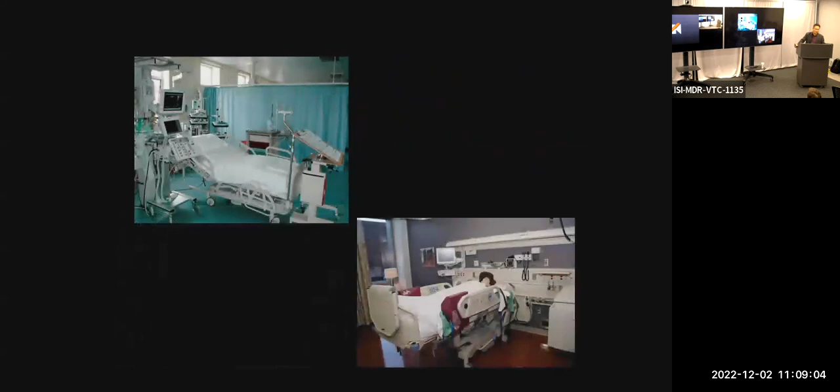Very fortunately, I used to work as an intern when I was a graduate student in a general hospital. Not as a patient, I enjoyed going to that facility as an intern student, and I was able to meet a lot of patients who are physically limited, especially in the ICU, intensive care unit, on the left, and on the right a general patient room. I was able to see many cases where the patients' physical condition is very limited, so the only thing they can do all day is lie in a bed and see very bright fluorescent light all day long.

And their temperature, lighting, everything is 100% controlled based on the preference of the doctor and nurse, not the patient. So it gave me a lot of inspiration and also motivation: what should I do further in the architecture domain to make people healthy and comfortable and stay in well-being?

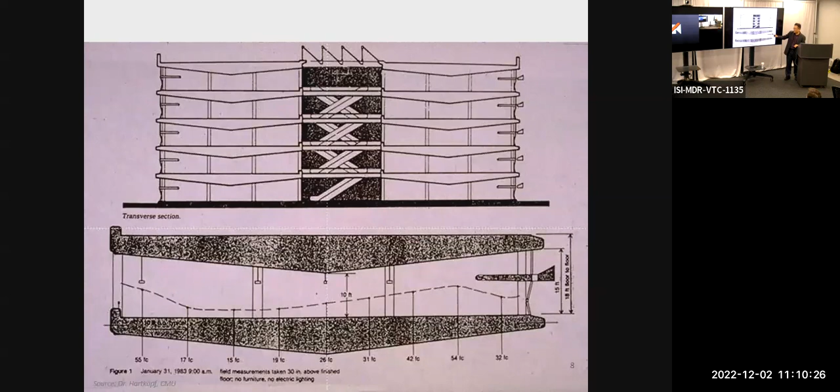This is one commercial building in Northern California, built in the 1980s. In the 1980s it was not common to include sustainable, environmental design in a building project, but this one is really innovative, considering the era. They adopted a sloped roof and a light shelf, so they can bring more daylight into the inner space. It means they can minimize the use of electric light and save energy by maximally using daylight.

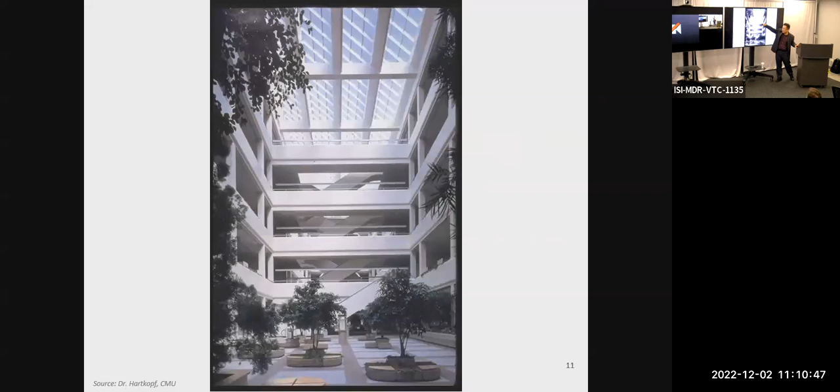This is a really nice view from the lobby. They also have a skylight so that they can spread the beautiful daylight across the space. The thing is that people started using umbrellas here and there, rainbow and orange, and then blue.

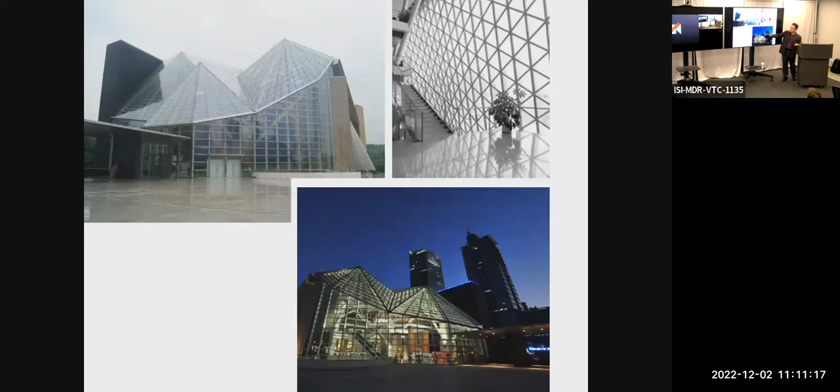That is my favorite color. It happened because, as you may guess, too much light. And this is a public library in China, designed by a very, very famous architect, Arata Isozaki. So this is a public library and all glass covered, so it looks really nice. But people started using umbrellas again, in a different way. Like this. This guy looks very serious, and except for this guy, almost everybody is using the umbrella this way because of too much light.

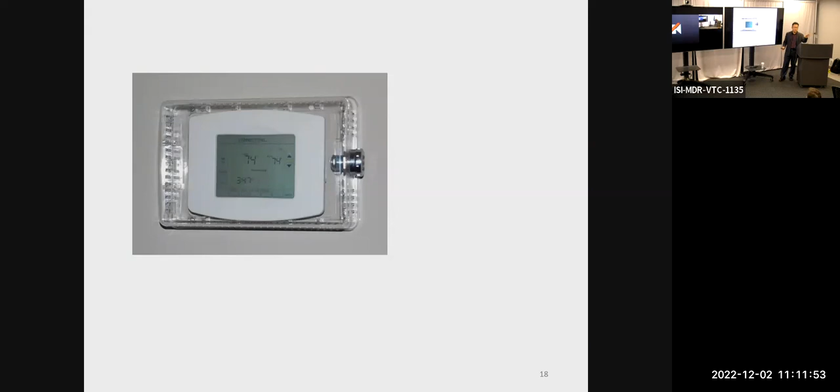So I believe that if you visit a commercial office building, you may find this very clumsy-looking plastic box over a thermostat, because nobody in the facility department wants you guys to access and control it. So that's why they put a box like this. But people are smart, so they attack it with ice to cool down the temperature so that it can actuate the heater, or you can poke it with something sharp like a key to push the button. Okay, that happened. 21st century, very innovative. I'm not sure it is smart, but very innovative.

So wherever you're staying, residential, office, healthcare, or school, we are always surrounded by thermal, acoustic, air, and lighting, which is visual quality. So the issue is that building occupants demand very different thermal, lighting, acoustic, and air conditions, depending on their physical characteristics. But unfortunately, the building performance standard says, hey, 75 degrees Fahrenheit should make everybody happy, so set everything to 75, okay? Even though I prefer 78, and some people may prefer 73, it is not possible.

So everything these days is smart, right? Smartphone, smart car, smart TV, smart home, smart city, smart beer. Can you guess what smart beer is? Yeah, it comes with a very smart sticker that shows the right temperature to drink. It kind of changes color.

So the thing is that, in US commercial buildings, we are paying for the administrator. So this is based on an administrator. Their average annual salary is $45,000 per year. And for building operation like this, we are spending $450 per person for utility. Utility means heating, cooling, ventilation, lighting, and also plug loads like these appliances. So if we can increase worker productivity by 1% per year, we can make extra revenue, profit of $450. That 1% increase in worker productivity can cancel out the utility bill.

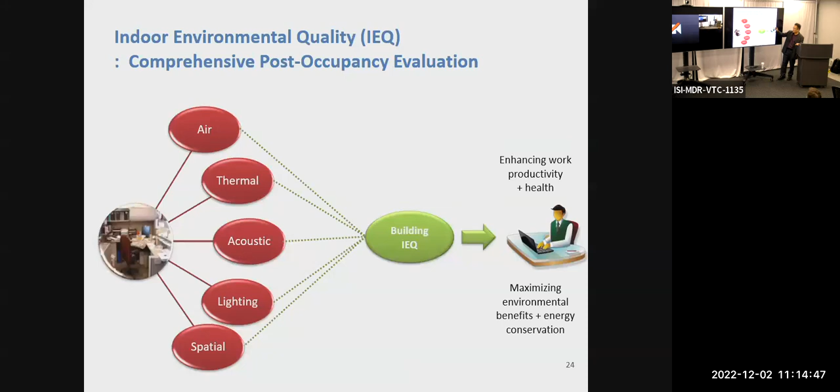Right, so that is really important financially, because worker productivity, even though it is not very tangible, as long as we can provide healthy indoor environment quality and comfortable environmental conditions, could be enhanced, so that we can save a lot of financial resources while also canceling out the utility bill. So indoor environment quality accommodates those major components. Those individual components affect the overall IEQ condition in the building, and can contribute to enhancing worker productivity, health, and also environmental benefit.

And the thing is that a human-centered approach is quite a challenge these days. Smart city, building systems, smart environment control. Many things we set up with the help of an electrical engineer or computer engineer. They make a perfect hardware setting and software setting, but we frequently forget the user, right? The building system control and the indoor environmental space are basically for humans, but there is no human itself. There is no occupant, no user itself. So that is a very unfortunate condition.

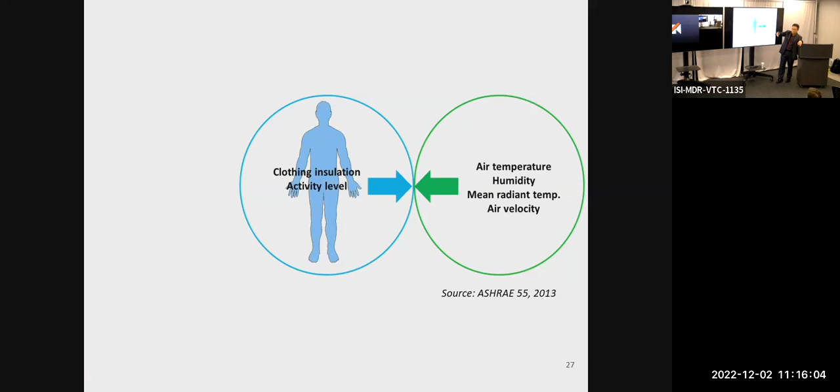So in conventional theory, for example, thermal comfort. The reason I think of thermal comfort first is that, building energy use wise, 45% of building energy is spent on heating, cooling, and ventilation. That is a significantly high portion of building energy. So this is thermal comfort theory according to the building standard. The formula considers clothing and activity levels, like running, sleeping, and sitting. And then the environmental factors: temperature, humidity, radiant temperature, like a cold surface or warm surface, and air velocity. Okay, so those are the conventional parameters.

So when we have a heat balance between the ambient and your body core temperature, we call it a comfortable condition. If it is cold, we are losing heat energy to the outside. If the air is hot, we gain heat, that is the warm condition. But the conventional standard doesn't care about body mass index, gender, age, ethnic origin, and other individual factors. So BMI, as you know, according to the BMI index, I'm highly obese, because of too much fat over here. And my wife is, weight-wise, almost half of my weight.

So we are always fighting. Especially during the winter, like this season, she always says, hey, I need to increase the thermostat temperature. And I insist that I prefer the lower temperature. So there are huge gaps. That's why we fight.

According to my friend who is a medical doctor, the fat layer over here is basically good insulation material. So it can protect my core temperature so that I can protect myself from thermal stress, which is cold draft. So in terms of that, I'm very proud of myself because my fat layer contributes to environmental sustainability and energy conservation by getting a lower temperature setting in the winter season. Anyhow, so that is the one.

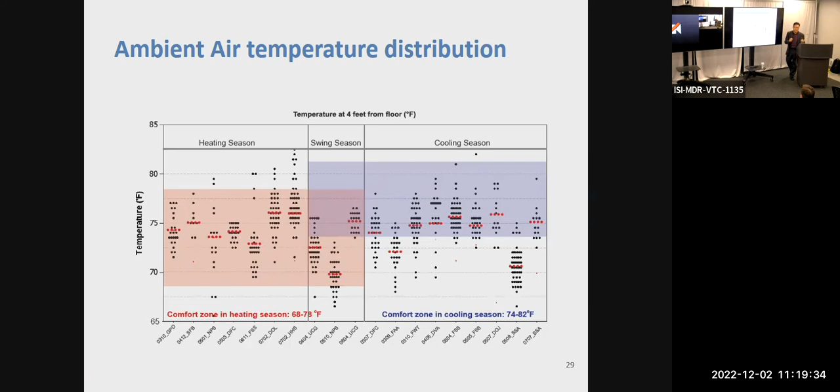So the issue is that in the US, we are spending too much energy on overcooling while we are frequently compromising users' environmental satisfaction and also energy efficiency. That's why the common issue in a building is too cold during the summer and too warm during the winter. That is a very ironic situation in the US. So let me share some videos. This is basically from a commercial, maybe 30, 40 seconds, but it shows the reality very well.

Oh, hey, hi, Stacy. How's it going? Really? It's 83 degrees outside. Right. And look at me. I know. Yeah. But it's been just so crazy slammed. Todd, you've got to do something about this office. You could bake a chicken in there. Right. I'm gonna take care of it for you, okay? Good man. You bet. Okay, anyone else?

Carry on, folks. Yeah, I think this one is very summarized. That's ISI, this building. Is it? Okay. Oh, I was about to say that. It might not happen in this building.

So actually, this is a commercial from a phone-based environmental control company. They developed apps so that you can report, I'm in room number ABC and I'm a bit cold, and some people may say I'm hot, and then they collect all your votes and provide some temperature. So it's still an averaging process. And this product is quite old, about 7 years.

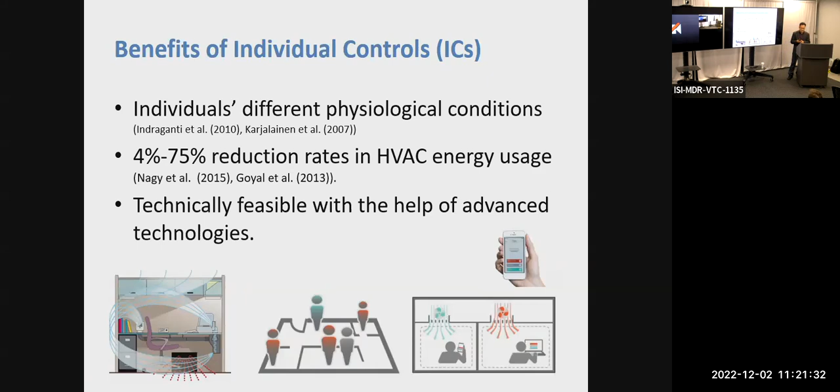Even though with the smartphone app many people believe it works, it does not actually. For the first 2 to 3 weeks, people are excited: hey, I have this really intelligent smartphone app, and they vote frequently. But after 2 or 3 weeks, nobody cares because you don't want to be distracted by this weird remote control voting system. That's why people's use rate decreases significantly like this.

The good thing is that people say, hey, I'm happy to wear many devices as far as they provide some health benefit, work productivity benefit, and also report my health condition. So it is really good timing, because with the help of advanced technology, it is really easy to collect data compared to the past. And even though we check body temperature for COVID or fever symptoms, basically we have two temperatures. One is body core temperature and the other is skin temperature.

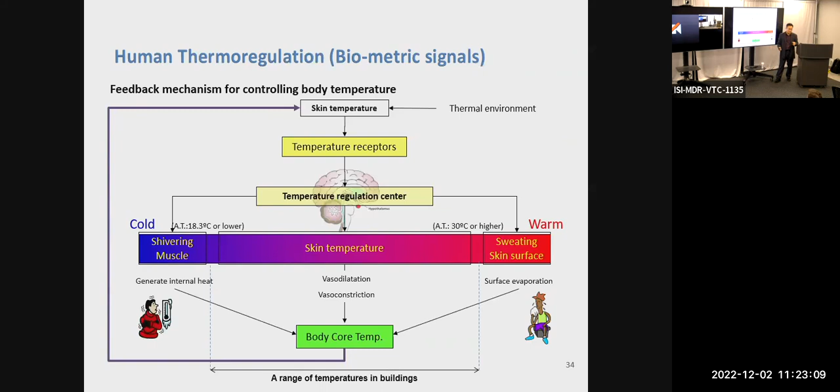So core temperature should be maintained at a certain level, almost 100 degrees Fahrenheit, but the skin temperature is always fluctuating to maintain your thermal physics, between ambient and your body. So sweating when you're staying in a very warm condition, shivering in a very cold condition, but between these two extremes, skin temperature contributes to protect your body core temperature. So it means that it can tell us a lot of good information.

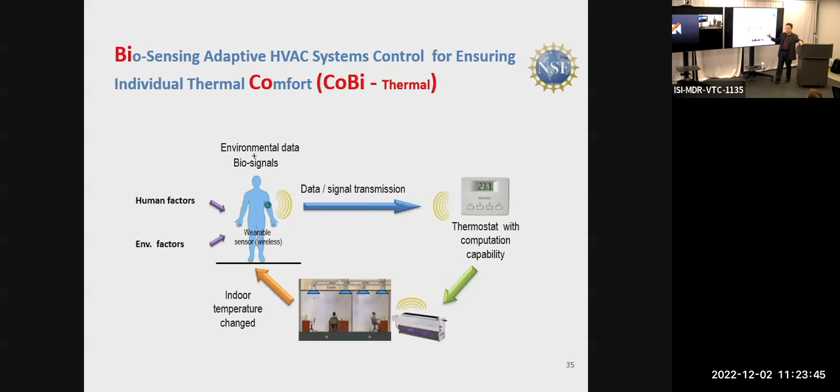So based on the physiological principle, we developed biosensing adaptive environmental control, as a function of human physiological information like skin temperature and heart rate variability. As far as we provide that information, this thermostat has a capability to estimate the individual thermal comfort and thermal sensation, so too cold, too hot, or moderately cool, moderately hot, and then override temperature so that it can stay in a very stable condition in a working space. So this is the mode.

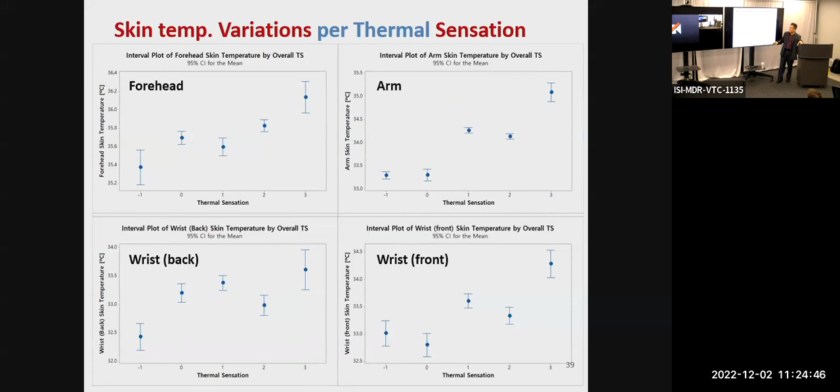As you see, even though they are staying in the same thermal condition, their arm temperature is completely different by individuals. And even for a single person, their arm temperature, forehead, wrist, and front and back, their temperature is completely different. It's not surprising, but it is the fact. And also depending on gender, they have clearly some differences like this. This one is more like a sensation, thermal sensation: slightly cold, neutral, slightly warm, warm, very warm.

So with the help of a machine learning algorithm, we started investigating how to estimate the thermal sensation as a function of skin temperature. We are using the absolute level of skin temperature, with some data for training and some for testing. And then we found that when we accommodate more sensing points, like waist, arm, wrist, front, forehead, neck, we can accomplish almost the highest accuracy rate. But when you select only the wrist, only 76%, 70 or 68, so very moderately low.

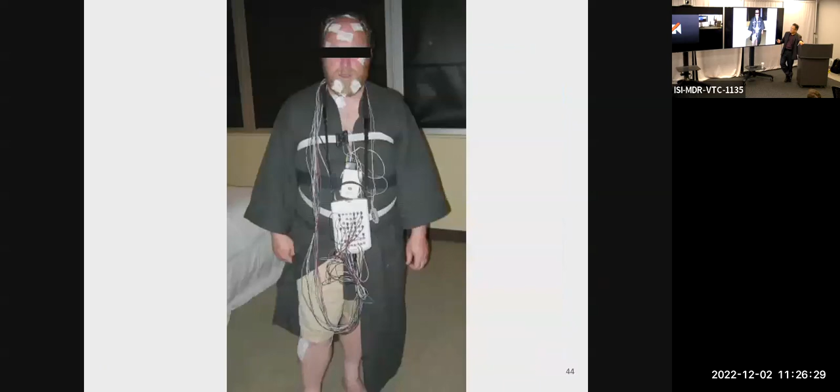The task here is predicting the 5-point thermal sensation rating. Yes, right. Actually 7-point, but we don't have the too extreme conditions. So the thing is that more sensing points guaranteed higher accuracy, but nobody wants to wear sensors like this, right? It is very crazy. So that's why we want to change. We want to select the optimal body segment with minimum sensing points, for practical purposes.

So we used the gradient of skin temperature and did it again, and then we found that the wrist, front, and back, like over here, the measured temperature provides 94% accuracy, which is quite good. And then we made a confusion matrix like this, showing which sensation is easier to predict. So this is the result.

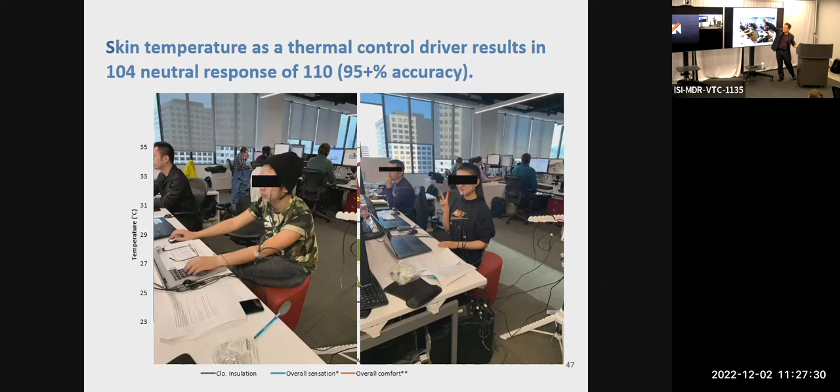And then we validated this prediction model in a real office building in downtown Los Angeles. It was quite interesting, and we were able to see a 94%, 95% accuracy rate in a real setting. So this is the algorithm that we developed, and this is the conventional algorithm for HVAC systems. Most frequently it is missing. So we tried to integrate, so we can control even a window-mounted AC, a very cheap one. As far as we can provide some intelligence, we can operate cooling or heating systems at a residential level without spending much budget.

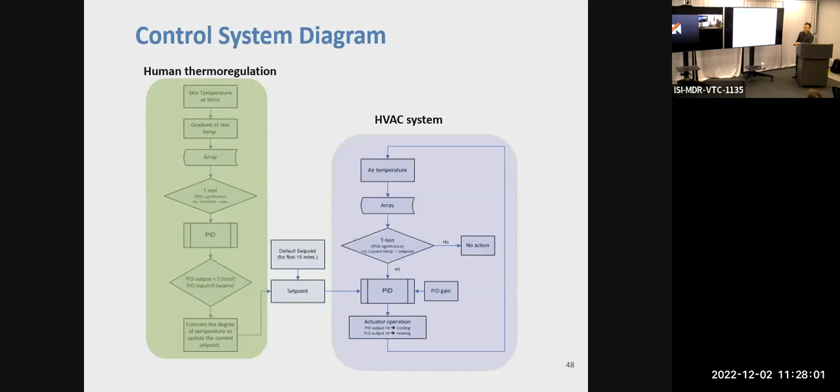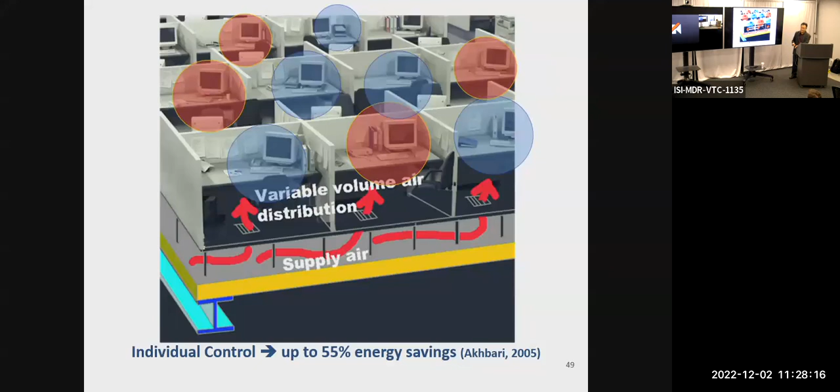And the other one is in an open office. As far as we provide an individual grill like this, we can generate a certain level of warmer and cooler temperature condition in each cell. So that is one thing. And also the PEM, personal environmental module, is commercially available. It gets main air from the main duct, like this, in this case an underfloor air system. So we can recondition, like recooling, reheating, and provide conditioned air to the user, like a car dashboard.

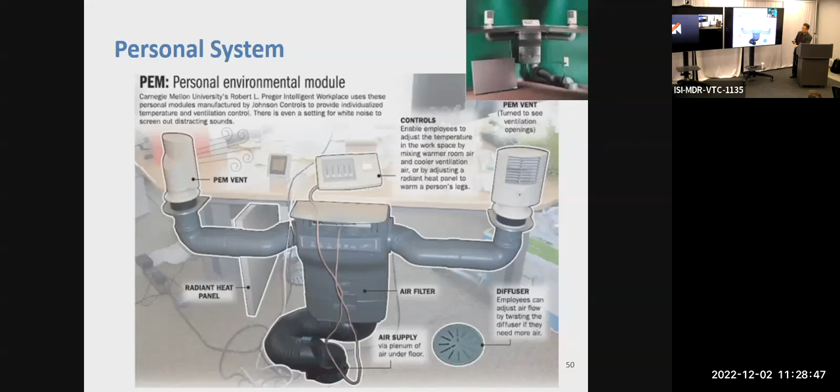Okay, so design-wise, that is one place that we can plug it in. Okay. So I started hearing some kind of complaint from people: "Hey, I don't want to wear any devices on my body. So what can you do?" And that gave me a lot of inspiration. Oh, what should I do?

And then we started using the infrared sensor, because with an infrared sensor it's much easier to detect your skin temperature, even remotely. In that case, your face is always bare skin, so it is much easier to detect the user's skin temperature from the face. So we measured the skin temperature to see if it is possible or not.

So we found that depending on the point, even on the face, they generate a different level of skin temperature. So we tried to find which body segment, which skin area, is more meaningful or less meaningful. So this is the temperature variation. We selected 5 points: cheek left and right, chin, and forehead left and right.

So those are the points that we measured, and then we found that their temperature is always fluctuating. Even in the same thermal condition, facial skin temperature is very different depending on the spot. So we found that, in that case, we may use some overall temperature instead of just picking one specific point from the skin.

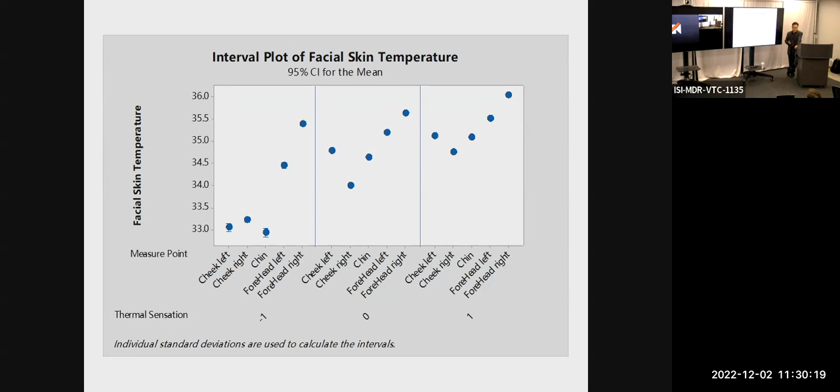And then we made a very simplified decision tree so that we can develop some general model. So model-wise, for example: gender is male, overall facial skin temperature is less than 34.7 degrees Celsius, gradient is larger than 0.02, ambient temperature is 26.3 or less, then neutral. It means that system-wise, no additional cooling, no additional heating, just stay at the same temperature.

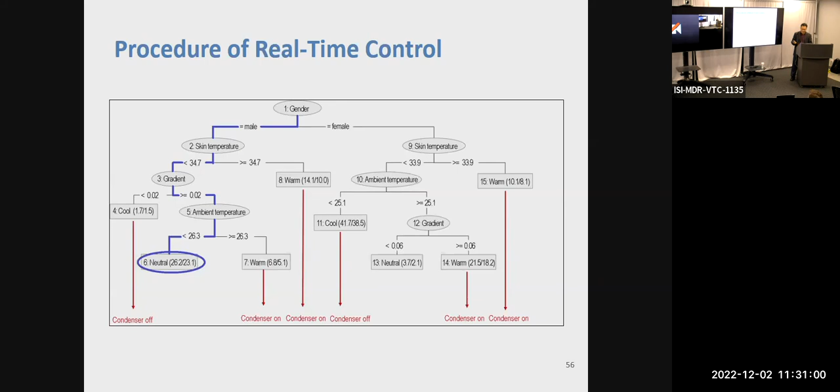So by doing that, we can do real-time sensing and real-time control in an individual setting. And then we also found that using a neural net, the overall accuracy rate is 94%. So that is the highest that we reached. Okay. And then for the next step, from the thermal study, we understand that each body segment is more meaningful.

Yes. Quick question. Why are you measuring performance as accuracy rather than error, like MSE, mean squared error? Oh, yes. Actually, we estimate the thermal sensation, which is basically a 7-point scale, but considering reality, we reduced it to a 3-point scale. So the 3-point scale is the one that we adopt. Oh, okay, so you're not predicting temperature. Right, not predicting temperature. Okay, I see.

Okay. So for the next step, as a next target in building performance and building systems, lighting consumes 20% or more of the total energy used in a building. So we asked, how can we control the lighting using human information?

Lighting quality is really important because you may have visual acuity issues, and your eyes get tired very instantly. With temperature, if I turn on the heater, it takes time, we call it time lag, to affect the temperature. But lighting is very instant, right? It's just dim up and dim down. We can expose the change instantly.

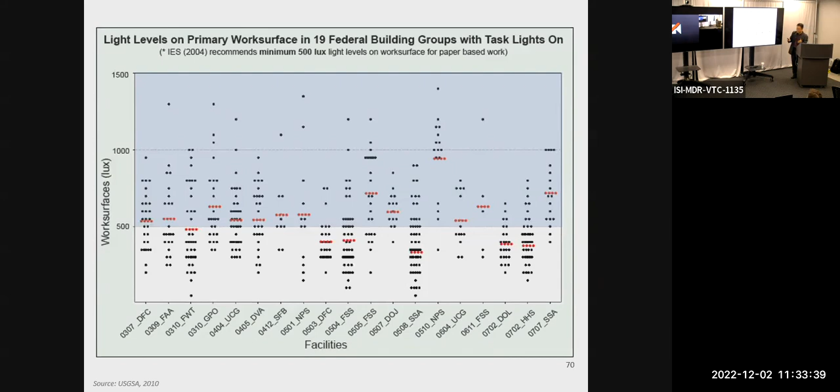And the other one is glare. We are exposed to glare, especially at the workstation. Your vision field is not supposed to include a light source.

So I can see you guys, but in my vision field, I can still see the lighting source from the ceiling. So in that case, you have a lot of fatigue and glare. So if you see me from your workstation, you can also very naturally see this lighting source. But if you do this, can you do this? Okay, what do you feel? Very comfortable, right? Your eye.

So that's why we need to be very careful to avoid the glare, because it is not easy for normal people to recognize any glare in their workstation. So in some cases, in the morning after coffee, you start working very joyfully, but maybe 1 hour, 2 hours later, you start looking like this. You try to reduce the size of your eyes because there's too much light on your eye.

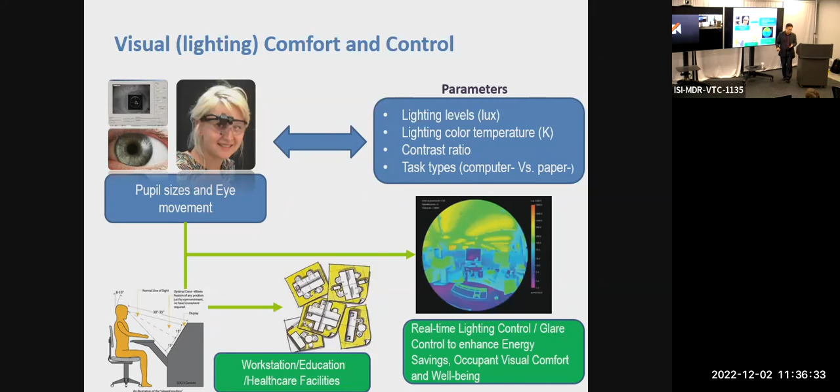So as far as we understand those relationships, we can accommodate that algorithm for lighting control or glare control in the workplace, for example. So at the beginning of the research, I thought everybody has an eye that looks like this. Okay, a beautiful round shaped eye. So it is much easier to detect the size, because if you went to a really good high school, you may still remember the formula to estimate the size. So I thought it is common and very easy to estimate, but in reality,

alien shapes. Okay, broken shapes, and also broken triangles. Okay, so I have one image of me. Actually, my eye is also not a clear round shape. So instead of just this formula, we started using pixels to estimate the size of your eye pupils. So in our test chamber, by generating different levels of lighting condition and lighting color temperature, we did a lot of user studies.

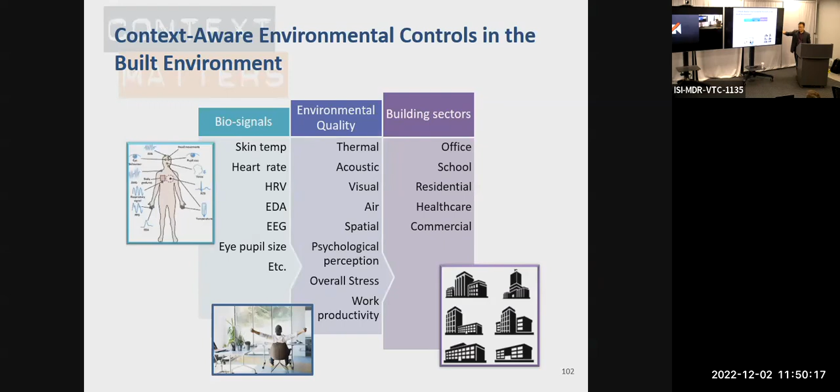And even though we have a lot of variations, a number of different algorithms, I believe that context-aware AI or context-aware machine learning could be one thing that we can figure out together, especially in the domain of building.

So what I can offer, if I have the opportunity to work together with you, is that I can be a bridge builder. I have worked as an associate dean for research for 4 years; this is my 4th year. And I believe I have less of a communication barrier in terms of intellectual merit between the medical school and engineering or computer science. So I believe I am well trained to communicate with those people.

And also as associate dean and center director, I am actively establishing new initiatives, especially for research, by maximally utilizing the current intellectual resources available at ISI and USC architecture. I always like to work as a team rather than individually. So I think I have some skill to manage collaboration or partnerships.